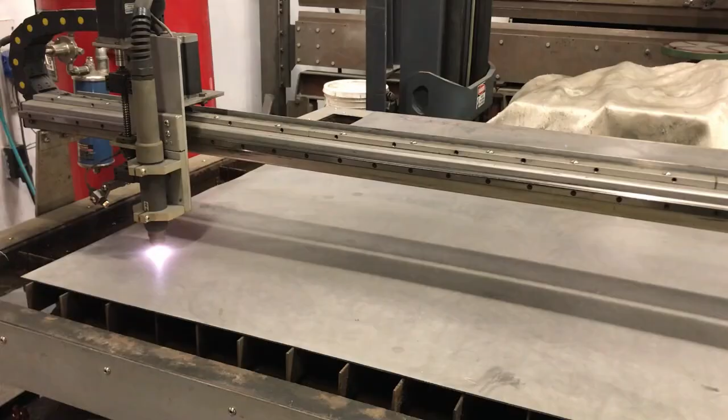This video shows how to make signs like these, in which the letters and symbols are connected together so that they create one part. I will use the IdeaPlasma version to show this, but this concept works for the version of MillWrite for milling machines and wood routers.

This video will show how to make a simple sign in which some numbers and a symbol are attached to a rectangle. At the Setup page, there is an option at the bottom of the NC Format tab to fuse contour overlaps. Set that option to Yes.

You might get this message telling you that the Auto Set option will be set to No. This option is only for the laser and plasma versions. This option is at the bottom of the Defaults tab. This option allows IdeaPlasma to automatically determine if the items you draw should be set to contour outside or contour inside, and it can set their machining batch.

This option is useful when you are cutting parts out of a sheet of material. However, to fuse the overlapping contours, set this option to No. The image to the right shows horses and numbers joined to a rectangle.

When creating simple shapes, it's also useful to turn on the option to remove the dropouts. The image to the right shows that this causes the 3D model to eliminate what it assumes will be the scrap pieces of material, so that you can get a more accurate view of the final part.

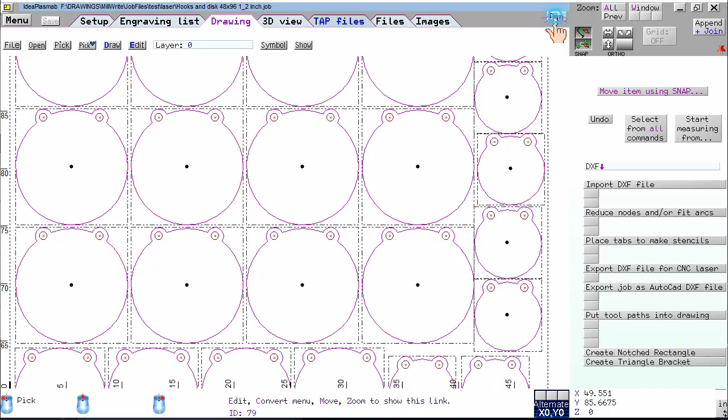Removing the dropouts increases the time that it takes to create the 3D model, which is insignificant for simple signs, but when you are cutting complex items with dozens of parts, such as this job, you might want to turn that option off until you are finished designing everything, and turn it on only when you have completed the drawing.

Now I will create the sign. I will begin by drawing a rectangle that is 6 inches long and ½ inch tall. I'll put the center at x0, y0, but the x0, y0 location of the drawing can be changed at any time.

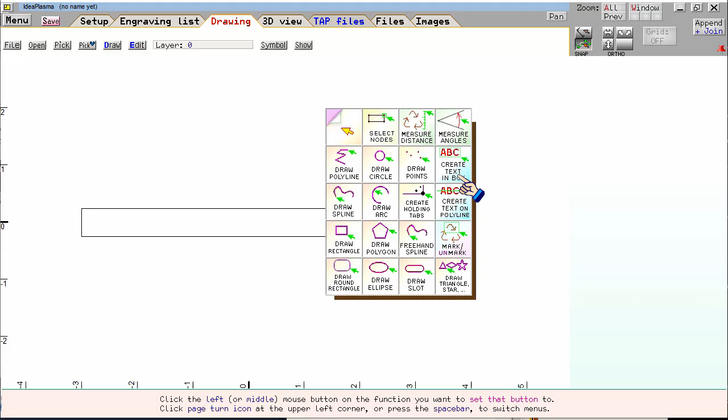Now I will create the text. The 3 mouse icons at the lower left corner of the screen show that the right mouse button will bring up the New Item menu, so I will click the right mouse button and select the option to Create Text. When I start to draw a rectangle to show where to place the text, messages appear on the screen to remind me that I can type the height and/or length instead of drawing a rectangle.

So I will type 3 for the height. I will not specify the length of the text so that the length is whatever is normal for the text. Then I click the left button to place the text in the drawing.

You should not worry about where to place the text at this stage of development because you will probably have to move it after you have set the font, spacing, and other parameters. Just place it somewhere and then adjust it so that it looks the way you want it, and then move it into position. I will click the left mouse button to place it here. I then enter the text.

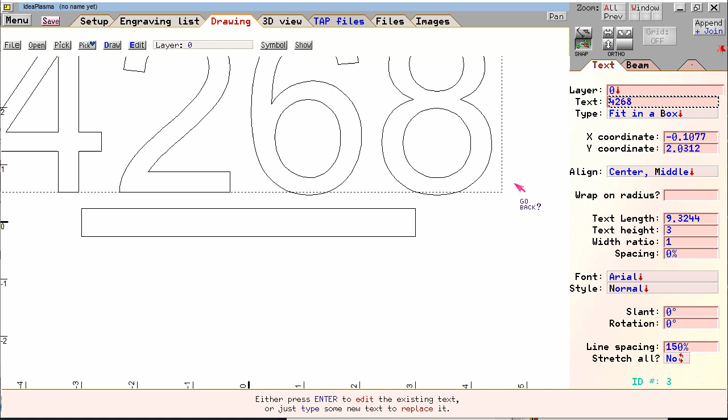After clicking the Go Back button, its parameters appear on the right side of the screen. At the Beam tab, the usage shows that it is set to contour outside. This is because at the Setup page, the default machining operation for both text and geometry has been set to contour outside. Now I will move the rectangle so that it is touching the text.

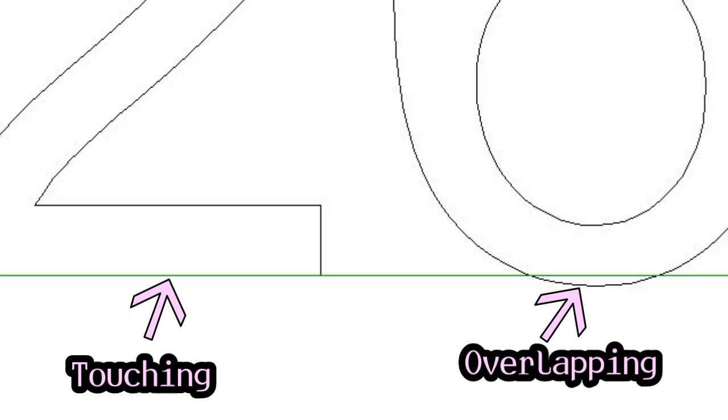In order for the rectangle to fuse with the text, it has to either touch or slightly overlap each of the text characters, or it has to be closer than the width of the kerf of the plasma torch. It is actually the tool paths that are fused together, not the shapes.

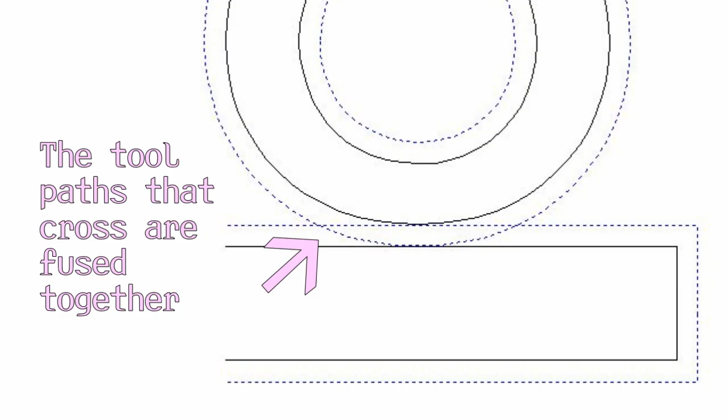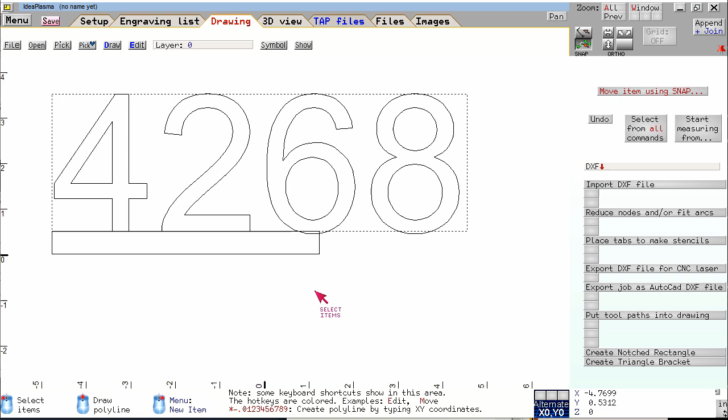Now I will move the rectangle so that it is touching the text. I will click the right mouse button and then click the page turning icon in the upper left corner, and then select the Move Item option. I need to make the rectangle a bit longer. I'll click the right mouse button and select the Extrude Link function.

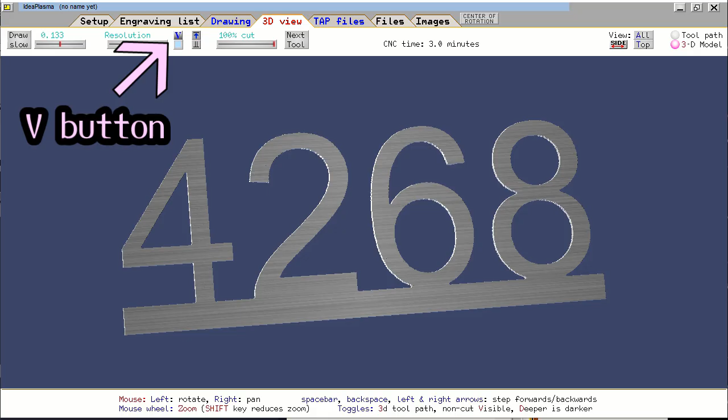This lets me extrude one side of the rectangle without altering the other lines in the rectangle. I will now switch to the 3D view page to see the toolpath and click on the 3D model option. Clicking the V button at the top of the page or pressing the V key on the keyboard will change what is visible. The upper left corner shows that it is now showing the cutting path of the torch.

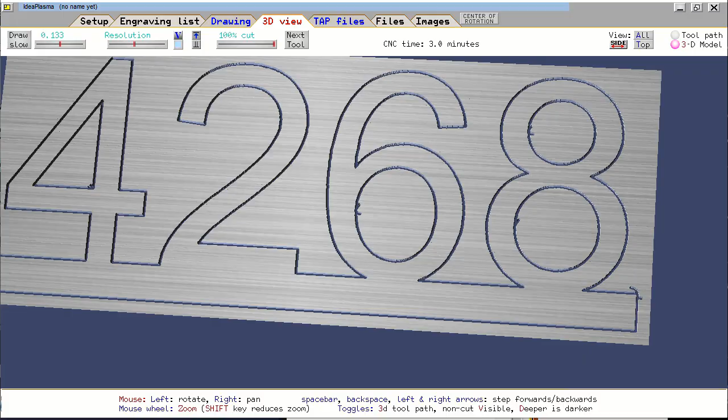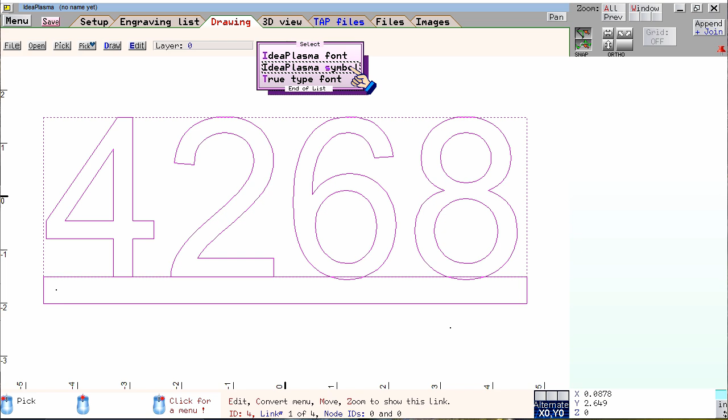When the 3D model shows everything, you can zoom in to see the lead-ins and whether you've specified a lead-out. Now I will add a horse to the sign. If I had a DXF file of a horse, I could click the File button and then select the option to import a DXF file. But there happens to be a horse in one of the sample symbol files, so I'll pick that instead. I'll click the symbol button and then select the sample symbols font.

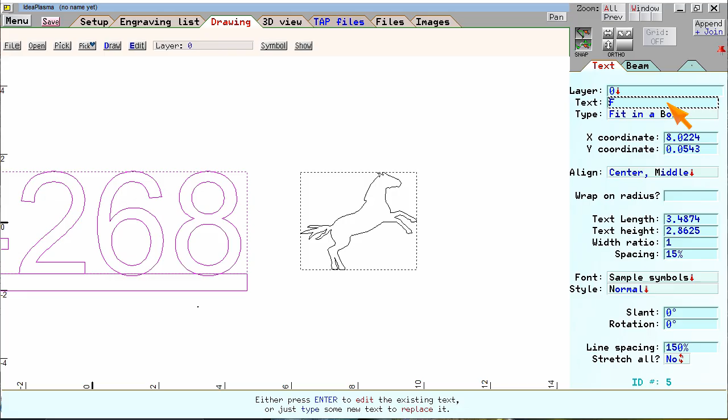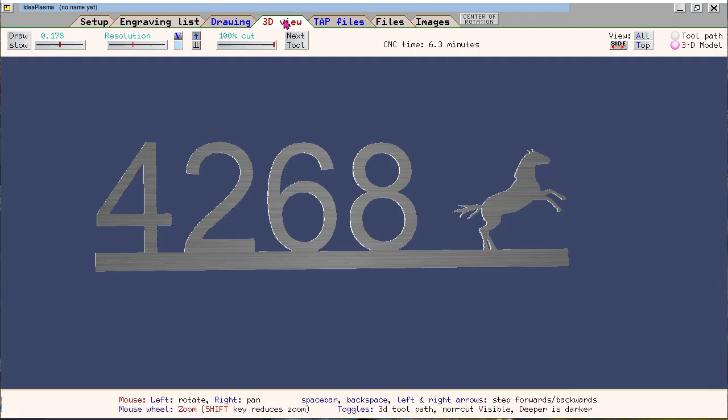I will select this horse, and I'll draw the height I want it to be, and I'll click here to place it in the drawing. Then I'll move its location, and I'll use the extrude link function to extend the rectangle. Switching to the 3D view page shows that the horse is now joined to the rectangle.

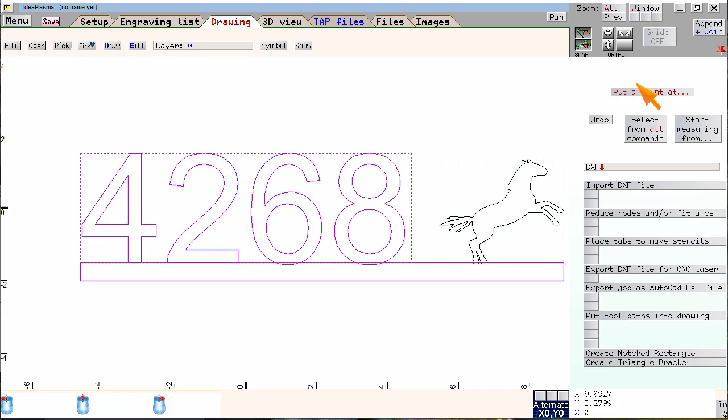Now I will add 2 holes to that rectangle so that the sign can be attached to a house with screws or bolts. I'll click the right mouse button and select the option to draw points. The rectangle is 1/2 inch tall, so I'll put the point 1/4 inch away from the edges. In order to place the point precisely, I click the button to put a point at, and then I select at a distance. I then click one of the corner nodes of the rectangle. That will be the reference point.

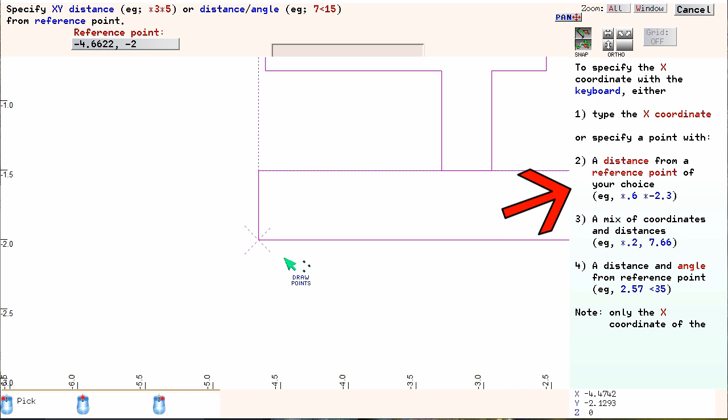The message along the right side of the screen shows the options for specifying the distance. I will use the asterisk to show that I want it to be 0.25 units in the X dimension from the reference point and 0.25 units in the Y dimension. The dotted X shows where it's going to be located. Then I press the Enter key to place it.

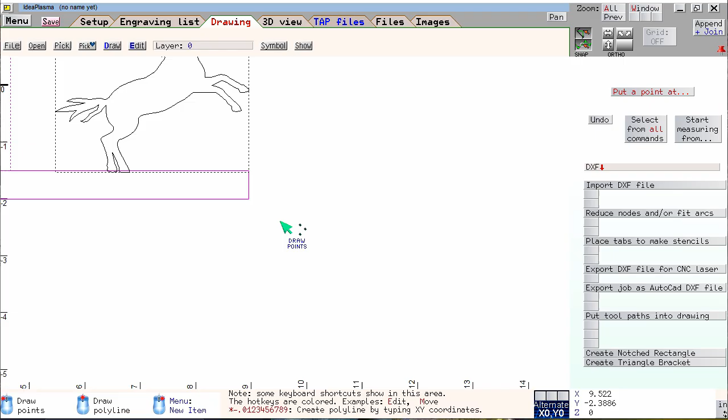I will put a point at the other end of the rectangle by drawing a point here to show you how you can move points. When the mouse is hovering over that point, notice the bottom of the screen has a message that you can press M to move the point. So I press the letter M on the keyboard and then pick at a distance. I then select the other node of the rectangle, and this time I want it to be 0.25 units towards the negative x-axis, so I type minus 0.25, and then 0.25 upwards in the y-axis.

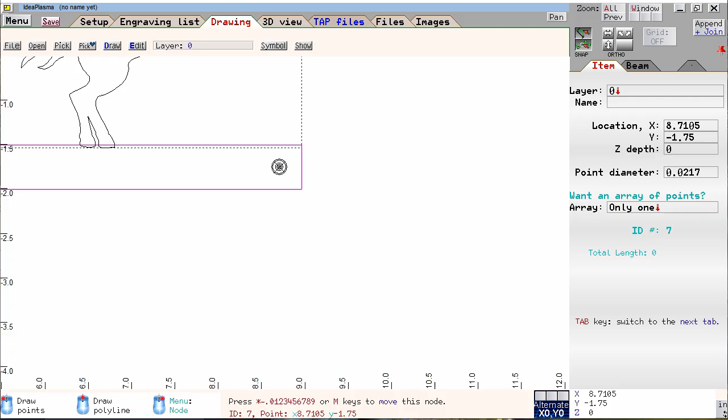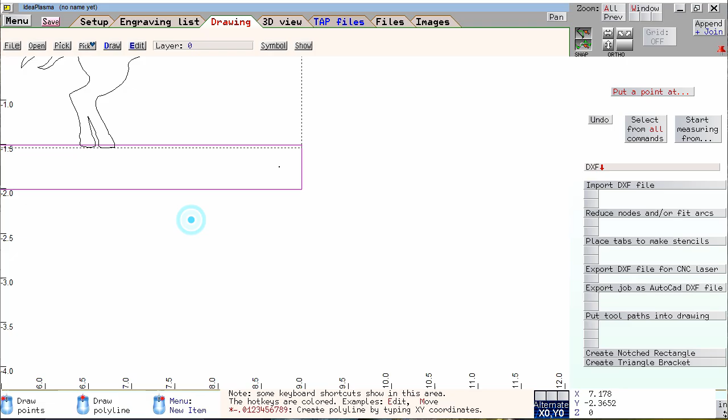A point can be either set to pierce in order to cut a hole, or set to spot by turning the torch on and off for a brief period of time so that it leaves a burn mark to show where to use a conventional drill to make a clean and accurate hole. So I will set this point to be a pierce point. I will leave the other point as a spot point so that you can see the difference in the 3D model. The spot points look like small depressions in the material, whereas the pierce points are holes. This makes it easy to distinguish between them.

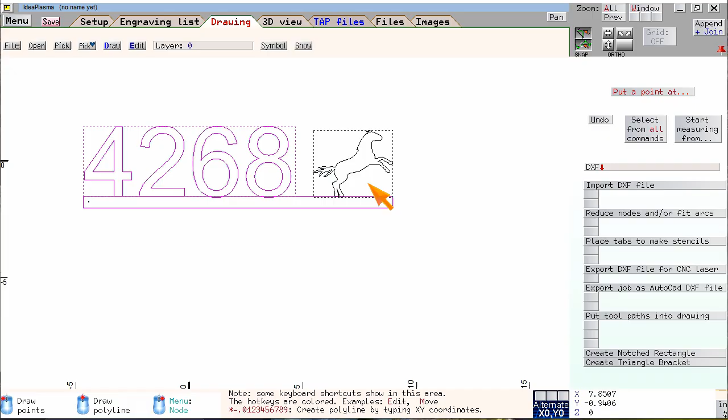Now I will add a circle to each end of the rectangle so that the sign doesn't have sharp corners in those locations. I'll click the right mouse button and select the Draw Circle function. Then I click the point that I previously created, which is where I want the center of the circle to be. Then I make the circle the size I want. I can adjust the radius and its XY location along the right side of the screen.

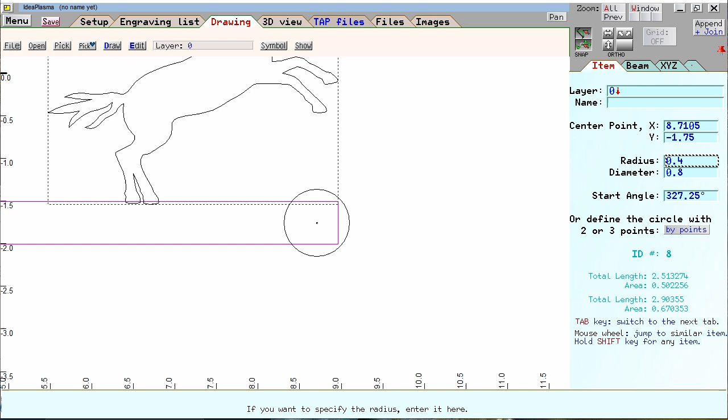To put a circle at the other end of the rectangle, I will let the mouse hover over the circle and then hold down the Control key, which brings up a menu. The bottom of the menu shows that Control-C will copy the item at the mouse to the geometry clipboard. So I press C while holding down the Control key. Then I press Control-V to paste the item and use the scroll wheel to get to the other side of the rectangle, and click the other point to put the center of the circle on that point.

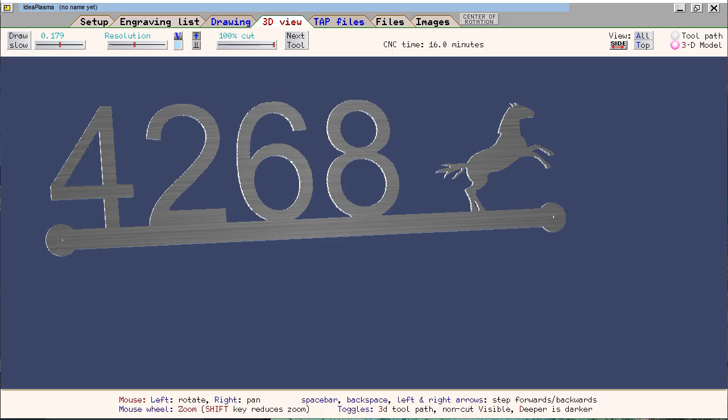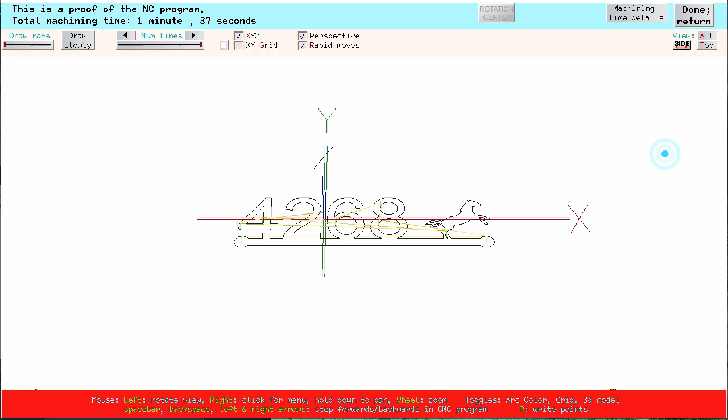I can now switch to the 3D view page to check if I like the design, and if so, I switch to the TAP files page, and there is a CNC file for the plasma torch. If I click the Show Tool Path button on the right side of the screen, I will see the path of the torch, and if I click the Draw Slow button, I will see that it's cutting the inside sections first and then the outside sections.